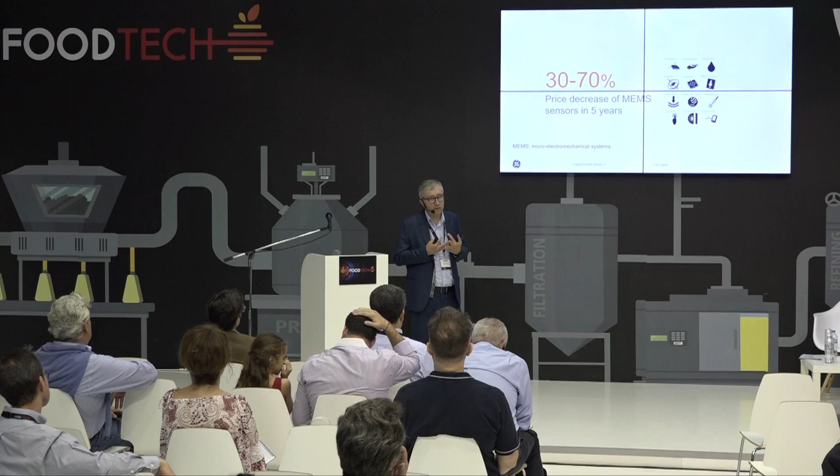There's a third one, the price of sensors. Sensors are ridiculously cheap these days. You can buy pressure sensors, GPS sensors, etc. Look at how many sensors you have in your pocket, in your smartphone. You have many sensors, and that's the same for industry. You can really afford putting sensors on things which have no instrumentation, and that's one thing I will explain later.

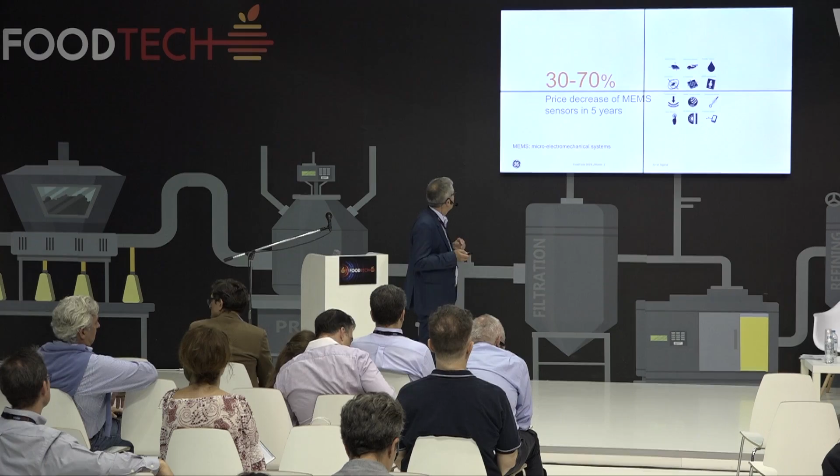And there is another one, which is mobility. We performed some studies in the US, especially in Canada. We looked at operators, especially mobile operators, and we found out that mobile operators are 30% more efficient than operators who just stay in the control room and wait for something to happen, basically. So that explains why so many people now are using tablets and smartphones to do control or monitoring from their home or office.

So the last one is probably the most important one. The others are just tools. But if you look at the different conditions, I have a version of this for every single vertical I'm covering, and I work a lot with the water people. Water treatment has something similar, except that productivity and quality would probably be about availability. But if you look at the food and beverage business, it's all about productivity while keeping the quality.

It's about risk, which is tremendously important, and it's about reducing cost. Some of you in this room know what I'm talking about. Some of the companies I know in the food and bev industry have razor-thin margins on their products, so anything that's a grain of sand in the machine can kill the company. They need to be really careful.

The idea is to plan for the digital transformation for a purpose. You don't digitize because you have to digitize. The idea is to plan it like you plan a journey, and in this case the first thing is to set the goal. Again, from conversations with customers I know, they don't really have a clear goal. Or sometimes they want to ride the horse and just start without even understanding what kind of benefits they will get from the digital transformation.

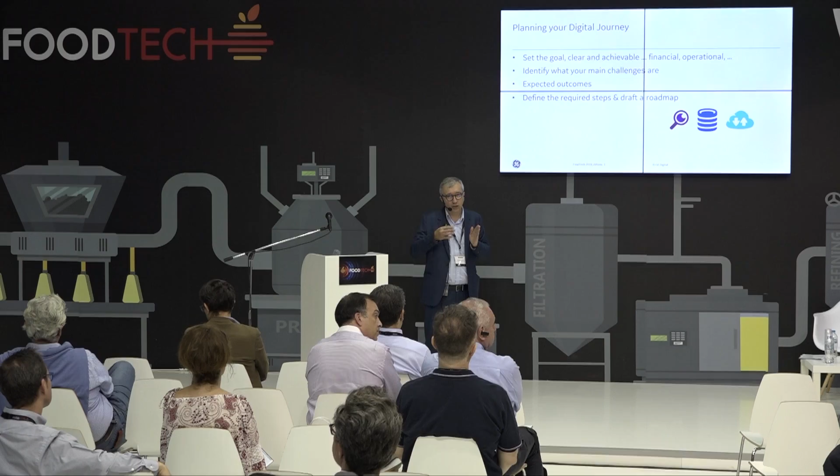So the idea is to look at the main challenges and pick something that's attainable, looking at the outcomes - what will I get from this? Probably pick one that's easy, then define the steps that will allow you to get there, and plan it as you do a product launch. So have some kind of roadmap with quantifiable steps. And that's what we do.

We have services that will help you understand what process improvements are needed, what keeps you awake at night, basically. Is it a quality issue? Is it an efficiency issue? Or is it something about your scheduling? There are many typical issues we can address which are sometimes difficult to identify if you live inside the company, if you're not outside looking at the various pieces, because you're only concentrating on your own business.

So having an external eye on the process will help you identify which one works best, and usually we pick the ones with the shorter return on investment, obviously. So the idea is to plan it and have these steps that go through the identification of what I want to do.

Business problems - then we have a process that goes through some briefings. We have what we call outcome maps. The outcome maps are usually a meeting with stickers on the wall where you can write your issues, and then you select the ones which are the most prevalent. Then we put a team together so these people can help you transfer this into a roadmap.

So it goes through some workout sessions, a design, and then putting the solution together. But usually this is something that's probably a few months, not the multi-year project that everyone fears. When I talk to people about digital transformation, they have the impression that it's like an ERP implementation. What we recommend is to do it step by step with goals that are achievable and realistic, not do everything at once.

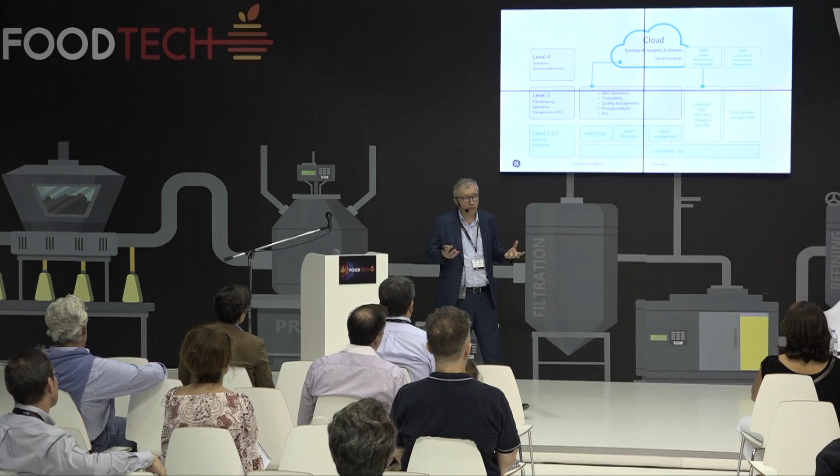They have a common point - they will fail at some point, right? They will fail, and I want to know when they will fail and what I can do to prevent them from failing, or what I can do to make them more efficient. So there are a lot of common points.

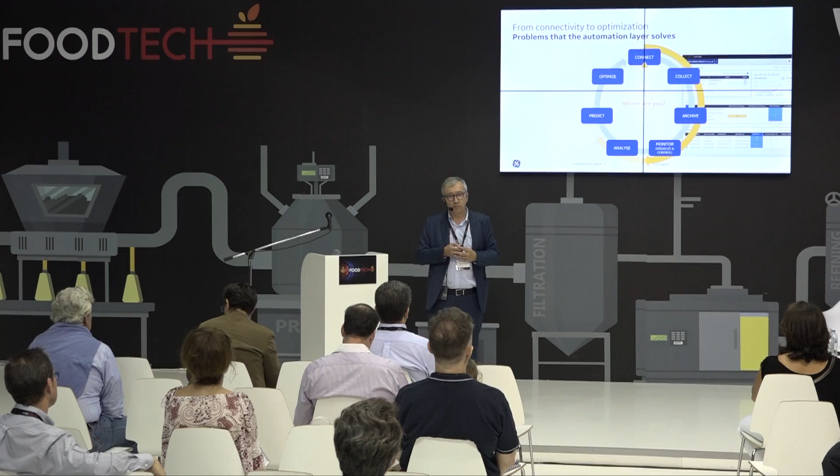So this is a chart that I like, not only because I put it together, but I think it's a good summary of the situation for a typical customer, wherever it is. There's another issue which is about interoperability.

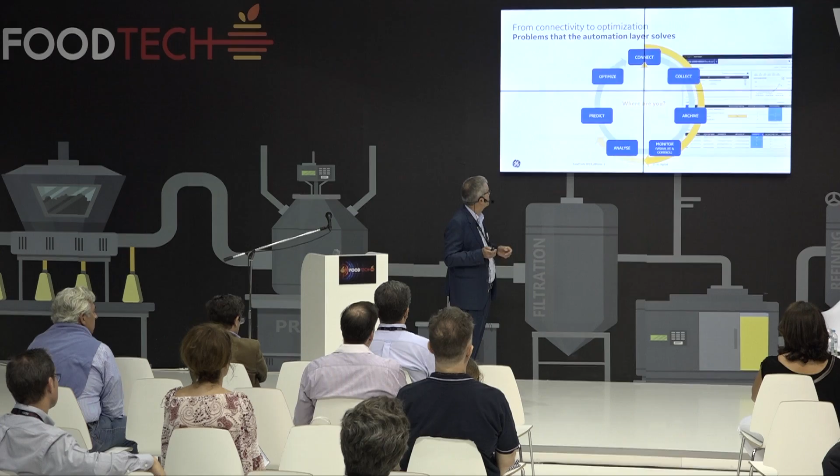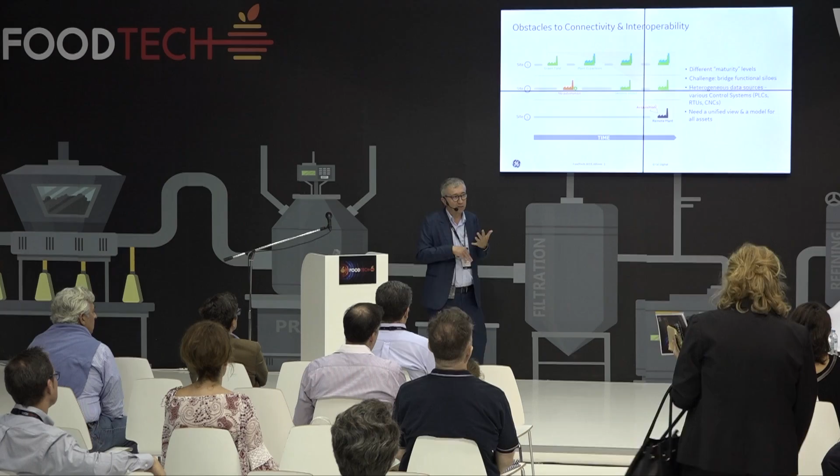So I was looking at the agenda and all the presentations you had today, and everyone talked about Industry 4.0, right? You all had presentations about Industry 4.0. I said I'm not going to talk about Industry 4.0, but if you look at the industrial internet and Industry 4.0, one of the key issues is interoperability.

This is a typical situation for customers who have several plants - you have a plant that was built a long time ago, it has some kind of automation maybe. You have another one on which you added sensors, so a different level of maturity. And then all of a sudden you buy a plant in the middle of nowhere in China, and they have another type of system, another type of automation.

The idea is that if you want to really have a holistic view of what's happening, and for example do some comparison between the plants, like one of our big customers, P&G, is doing in the US and worldwide, you have to have some kind of unified view of what's happening, right? And it's all about the data behind.

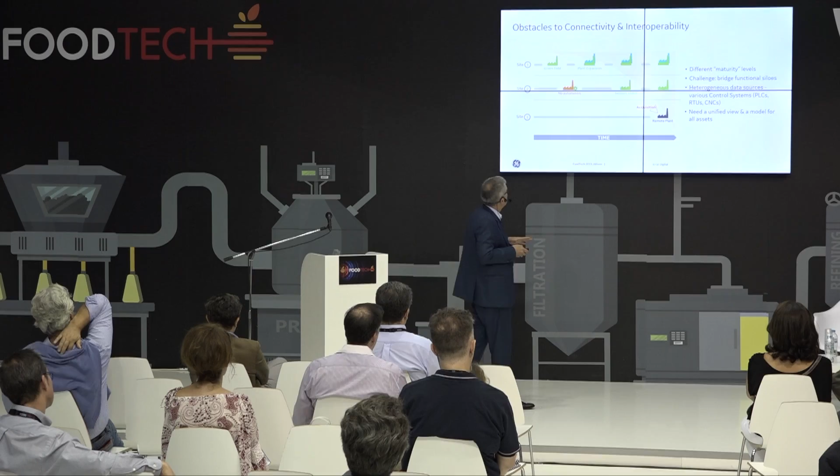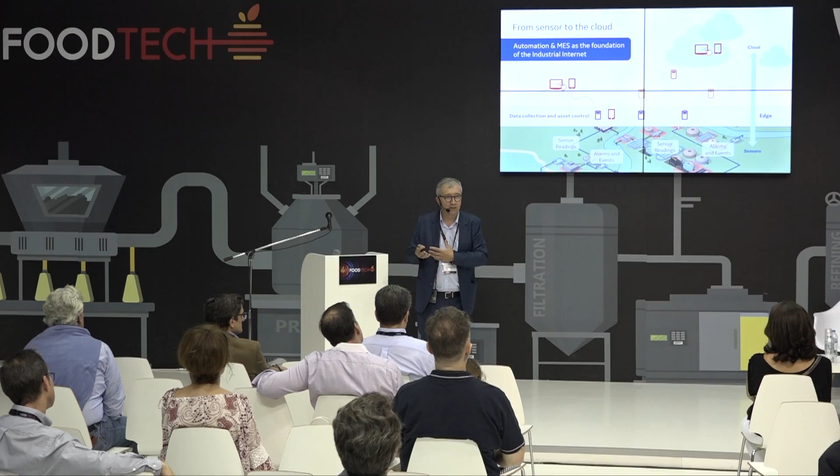And what we do is consider that building on top of the existing applications is what is required. So that's why in the title of this presentation, I had something about leveraging my investment, or not losing my investment, because many people already have data that they can leverage for their digital transformation that they don't even know about.

And we consider that everything that's on premises already is a source of information, because if I want to do some analysis, probably 80% of the data I need comes from the plant floor. That means that everything that comes from the HMI, from the MES, from various systems like CNCs, whatever - that's information to help me understand the entire behavior and have a holistic view of what's happening.

So, a few tips that I wanted to give you before the end of this presentation. One is about choosing a solution that can be deployed on top of existing installs.

You don't want to break everything, the human processes. You don't want to stop the plant for 6 months when you install something on top, whether it's an MES, an OPM, or an asset performance management system.

That's really important. Number two, it's about the data model. You can only compare things which are in the same format. So if I have a plant that shows some kind of OEE based on certain parameters, and the other plant has OEE but based on different parameters, that will not work. So having a common set of data and the data model will help a lot, and that will help apply my machine intelligence.

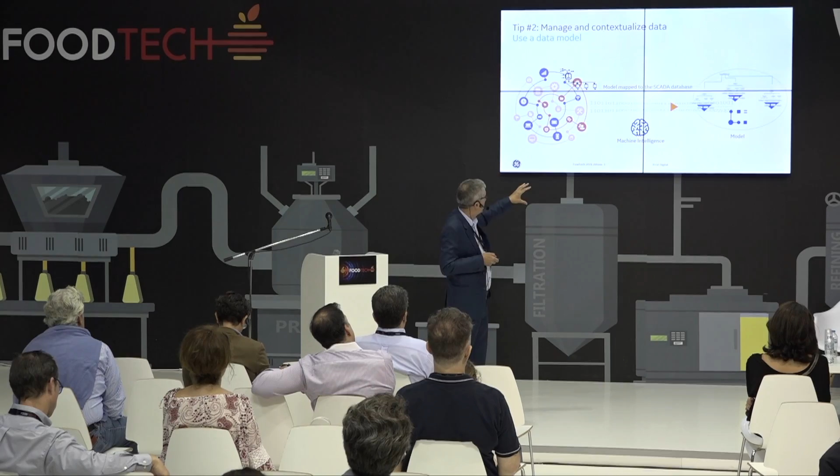Another one that's also around data and interoperability, that's about standards. We recommend that our customers use standards because that means that in terms of connectivity, you will be able to expose your data in a common model, and that will help you a lot.

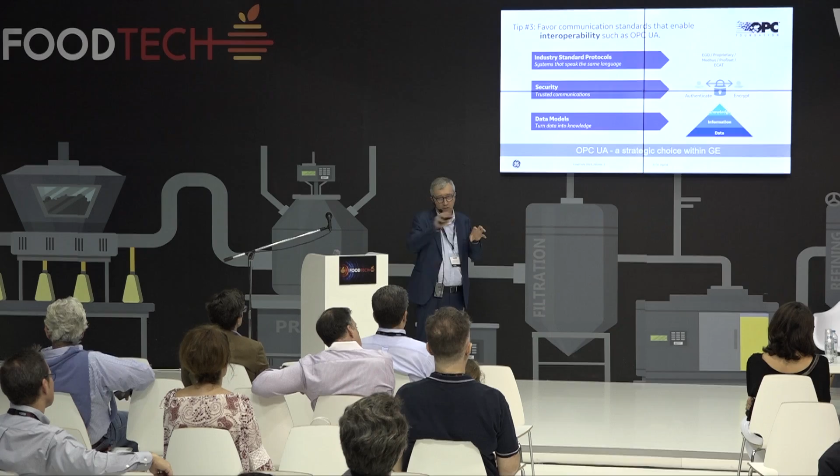That's what this customer I was talking about is doing. So P&G, they take data from different plants. For the moment, they have 50 plants connected with our systems, and they can compare the performance of a line here in the US, a line here in Europe, and they can take the parameters that work best for the other plants and spread these parameters around.

There's another one which is about sensors, and because we have all this intelligence now in the cloud, all this APM and OPM software, we can replace sensors with smart sensors. We can add more intelligence on top of these machines, even though sometimes it's difficult to measure. So that's something that we call analytical smart sensor. That's another technology.

Something really important is about recording what the operators are doing and managing the manual operations. The main reason why many MES implementations fail is because they don't take into account all the manual operations. So having some kind of work process management, that is key, just to fill the gap and also to prevent the data loss and the knowledge from going away.

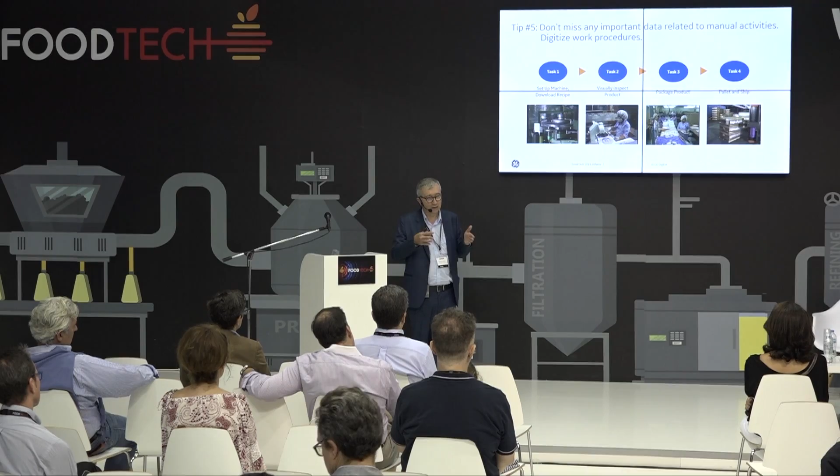Think about this. In the US, there are many companies that are looking for qualified people, and they can't find them. And all the people who had the knowledge are about to retire. So that means that if you have a work process management software, you can encapsulate the knowledge inside the system and make sure there's no knowledge gap when the people leave. So it's more than just making sure that these things are happening the right way. It's also making sure I keep the knowledge in the company.

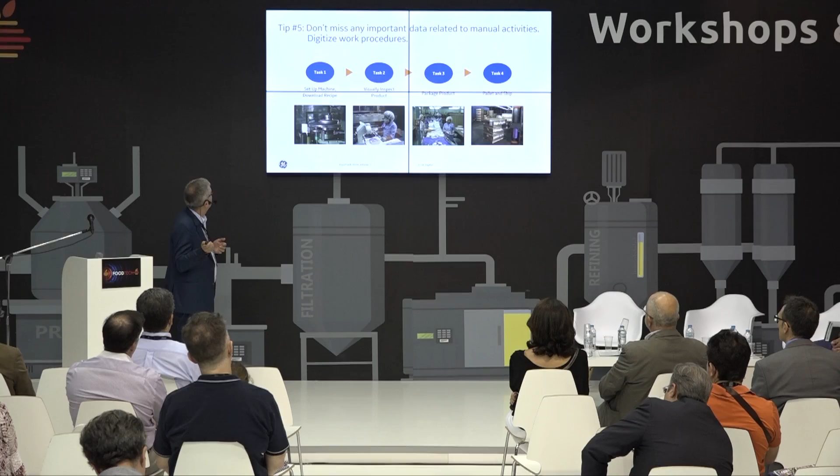And number 6, it's about hidden data. We always record data, and in the food and beverage industry, sometimes you have to record data for traceability purposes. Instead of looking at it as painful, use this data for analysis and make sense of the data, as well as data from other systems. That could be data from the employee database, data from the weather forecast.

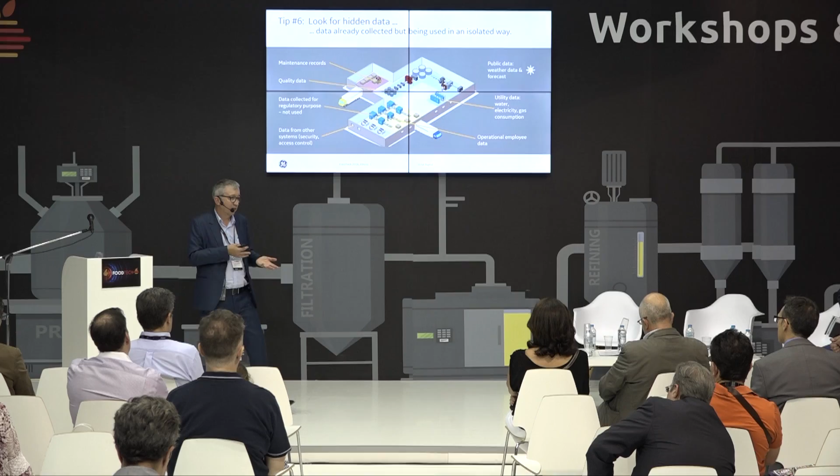I have a customer in the milk industry, and the weather forecast data has an impact on his business, just because the milk is not the same during summer and during winter. So that's the kind of thing that you can integrate into your system.

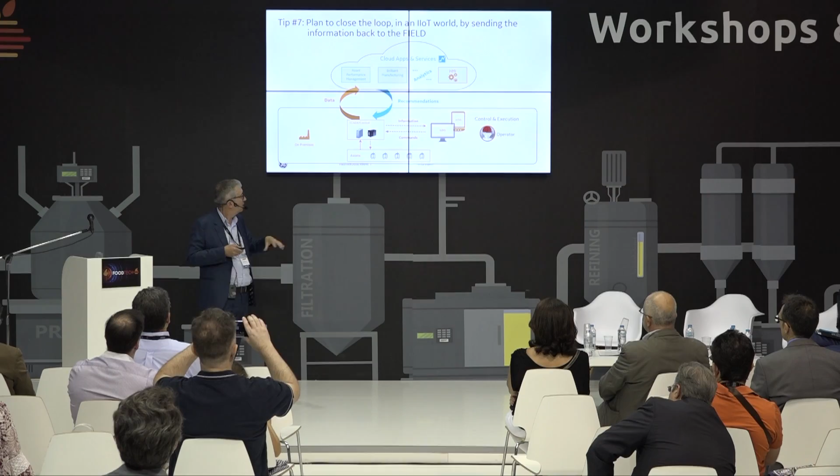Last but not least, close the loop between the execution and the analytics. I think that this one is key. Basically, I have information that I gather from the field, and then I send all this information for analysis, and I need to close the loop on the analytics, send the information back to the plant floor. And that's what the modern software can do.

So a couple of takeaways. Become a data-driven enterprise. Obama made a speech, probably 3 years ago, talking about all the data that the American administration has somewhere in their drawers. And he said that's kind of a treasure. It's the same for you.

As a manufacturer, you probably have data everywhere that you're not leveraging. So think about this when you want to paint a picture of your production, including all the data you already have from the existing systems. Layer the analytics and all their applications on top of the HMI, SCADA, and MES. Consider that this is the foundation for a successful digital transformation.

Understanding the knowledge that you have in your plant, and understanding everything that's in your data, that has a competitive advantage. That's how you can move forward and get this competitive advantage against the other people.